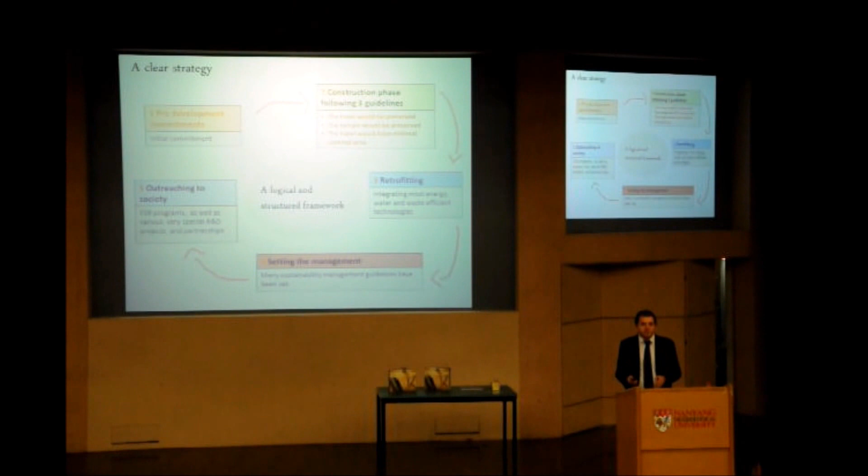The next phase was really about management and setting up a range of procedures, standard operating procedures, management practices, a lot of guidelines, setting up a management which will coincide with the vision of sustainable structures, not just from a structural point of view, but also from a soft approach with the management. And the latest phase of this sustainability strategy was really sharing what had been done with society, with a very broad range of stakeholders. And this resort has been quite successful at doing this. I can share some projects a bit later on.

So starting with the construction, what's very unique about the initial vision, there's been a lot of thoughts on how to build a resort on a forested terrain, and at the same time trying to preserve all the trees on site. So by trees I mean fully grown trees.

So if you come to the resort, you will very quickly notice that there are a lot of trees everywhere, and some of these trees are very well incorporated within the design. There are trees in very close proximity of structures. There are trees actually inside the buildings, inside some of the units where guests can actually stay and interact.

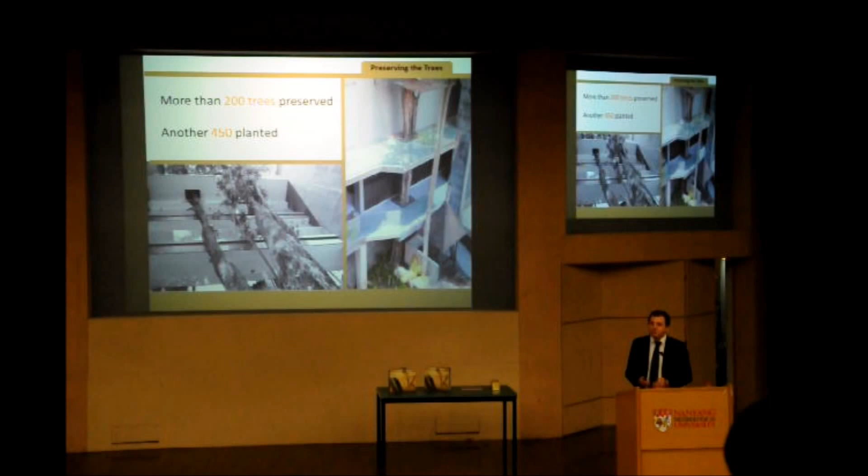It sounds easy actually to just say we're going to build a resort and preserve all the trees, but it was a very big commitment and a very big challenge in terms of construction practices, which are not very tree friendly, especially in Singapore.

So starting with the construction, most construction practices actually are very damaging to trees. If the trees don't die during the construction itself, they will most likely end up dying down the road a few months or perhaps years after the construction because of the damage caused, for instance, through vibrations generated underground through the different machines used.

So we actually apply a range of practices which really try very hard to minimize these impacts. Some very simple practices such as keeping certain distances between the main trees and the buildings in order not to affect the water cycle and the roots.

Another interesting practice was that before the resort was even built, the resort hired professional tree climbers that climbed all the trees and put lightning protections on all the big trees. This was both to protect the trees, but when you have so many trees on a site like this, you also want to make it safe for the people to be around.

So this resort actually has a landscaping team. The maintenance cost is actually quite high on a weekly or monthly basis.

Another important aspect was the use of machinery. Most machines in Singapore for construction, during the foundation works, use a lot of piling techniques which generate a lot of vibrations which can directly impact the tree roots and the trees.

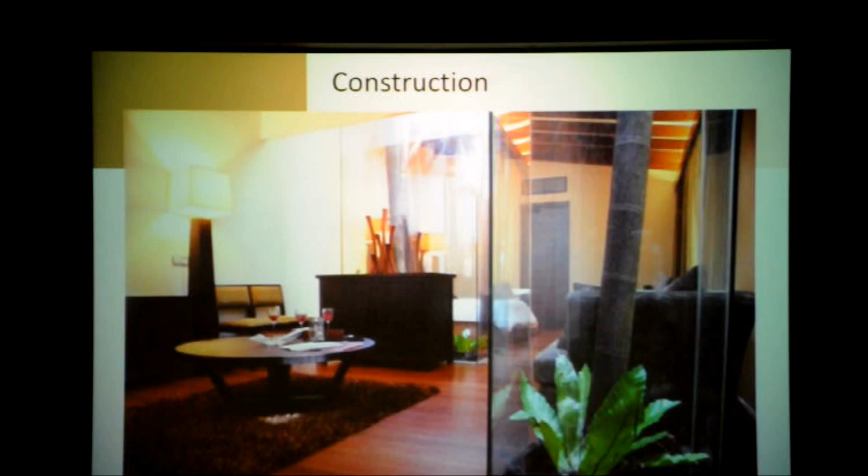As you can see, there are different types of rooms at this resort, and one of the special rooms are what we call the villa wing, which is located behind the resort. There are actually 12 villas, which are uniquely designed. They've all been very well incorporated as part of the design, custom-made to incorporate as much as possible the natural elements and to try to minimize these impacts.

As you can see, you have several trees. This is actually one of the smallest units. There are other units with many more trees and different types of construction techniques. But what's interesting is that different species of trees had to apply different techniques to preserve them.

So for this type of tree, for instance, we tend to categorize trees according to their rate of growth. So there are species which grow much faster than others. And for those which grow faster, we simply encase them in this kind of glass structure, so that they can have a lot of space to expand.

There's a few interesting points in terms of sustainable design with this concept. First, we can bring in a lot of natural light. Actually, the resort makes use of a lot of glass, and usually glass in construction is not so sustainable, it's not so energy efficient. But if you look closely, the glass is actually quite thick. It's a vacuum glass, and it's also a double glazed glass.

We have films on both sides which reflect certain radiation wavelengths to make it more efficient and keep the space cool. I will talk a bit later about the cooling systems that we have.

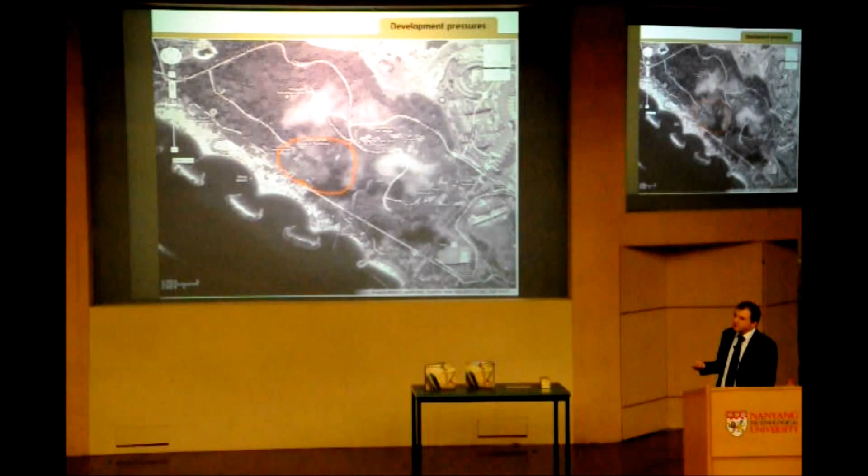Actually, the reason is that instead of applying conventional construction practices, which in this case would mostly involve doing a cross-section within the hill, cutting all the trees, flattening the land, and building from scratch from a flat surface which is stabilized, here we pretty much did the opposite, preserving the shape of the hills, preserving the trees, preserving everything which was there, and this played a big role in terms of preserving the ecosystem services on the site, which is especially apparent on this specific construction project, as I will talk about a bit later on.

There are quite developed water systems around the resort, making use of natural features, underground water systems. Preserving the landscape also helps to preserve the wildlife, the biodiversity, and a range of other benefits.

If we look at the satellite map of the island of Sentosa, we can see that there's really not that much greenery that remains. This is pretty much the secondary forest that remains on the island. If you look all around, you probably know there are all these big developments that have been going on, which have been quite heavy construction practices. So a lot of destruction of the forest and the land, a lot of reclamation work as well. The resort is pretty much within this boundary here.

So right in the middle of this patch of greenery, which also played an important role in the decision to develop this resort in a more sustainable way, to really try to preserve a bit of what was there.

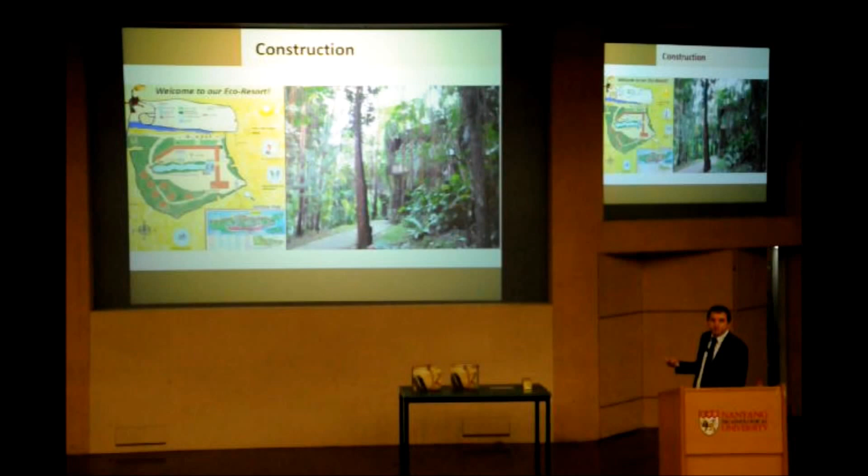Reused materials was another important aspect of the development. This resort makes use of a very high percentage of reused or recycled items within the core construction, such as cement, wires and metal structures, but also as part of so-called retrofits. Around the resort, some key examples would include this material, which we make use of quite extensively. This is actually one of the resort's own products.

This resort is a bit unique because there's the resort itself, but there's a range of other businesses which are closely linked, under the same management. So we can actually build things on other sites and bring them to the resort as a showcase and a test bed of various practices and technologies with a strong focus on sustainability. What's unique about this product? It's made 100% from recycled car tires. The manufacturing process itself is also considered quite sustainable.

There's less chemicals being used in the binding agents and other elements of the design, which makes it a sustainable product. Another good example is the extensive use of recycled wood around the resort. Actually, we collect a lot of wood from unwanted sites throughout Singapore, mostly demolition sites, which in Singapore would otherwise go to the incineration process.

As you know, in Singapore, because of the land constraint, most of the waste goes to a burning process in order to minimize the volume and then to send this to an offshore island for storage. But there's also a lot of issues associated with this in terms of the long-term sustainability.

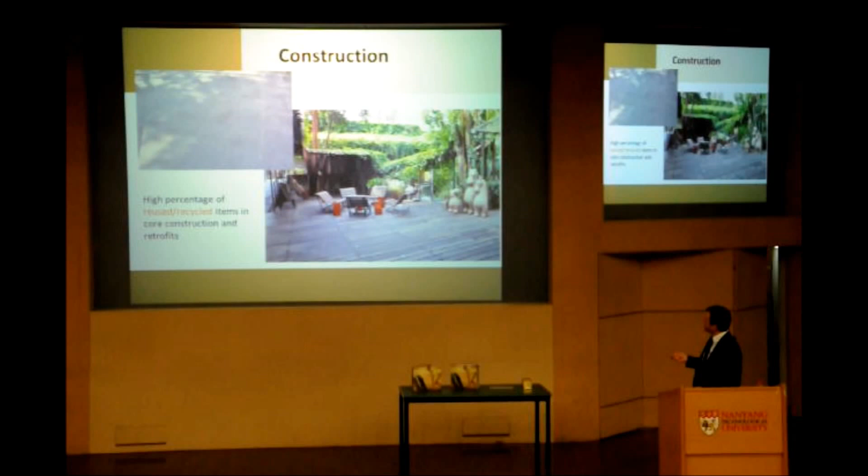In terms of design now, the overall resort was built on the concept of maximizing the use of natural light and natural ventilation. So pretty much all aspects of the designs are very open. There's a lot of elements which greatly maximize the usage of these two simple concepts. Some examples will include, this is part of the central court, and you'll see that it's very open.

We have an open corridor concept, for instance, which in many countries is taken for granted, but in Singapore, most buildings tend to close the corridors, which if you think about it, really doesn't make any sense from an energy point of view, even from a cost point of view, if you consider how much energy needs to be applied to cool down this space, which is most often aircon, to manage this type of buildings over time.

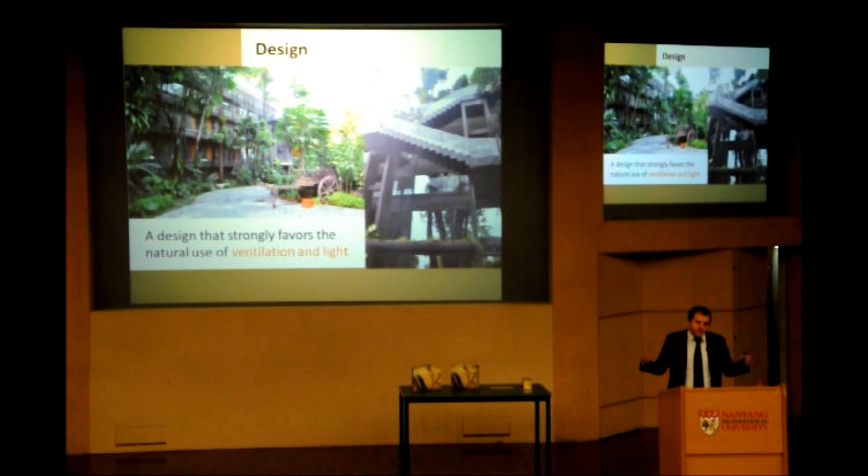Another important aspect of the feature is this central opening that we have in one of the main building blocks. This actually helps to capture a lot of the wind coming from the South China Sea. Because of the shape of the buildings, which is kind of a cone shape, it will actually speed up the wind and spread it within the central court, helping to naturally cool down the space.

In terms of water flow, there's been a lot of concepts as well as part of the design. A lot of the back-end systems have been customized to be more efficient. Some good examples will include the piping systems. Most construction projects in Singapore or elsewhere heavily use PVC pipes, which are these pipes here. Instead, we actually make extensive use of this type of piping, which is another type of plastic called PPR, which is more efficient especially in terms of heat transfer. There's less heat loss within the system by using this type of pipe.

We also make use of a multiple valve system. This is very important in terms of good water management. It's actually the best way to effectively manage water flow within a building. There are of course many initiatives where the government can give various kits to retrofit the sinks, the shower heads and so on, but this can only play a certain role.

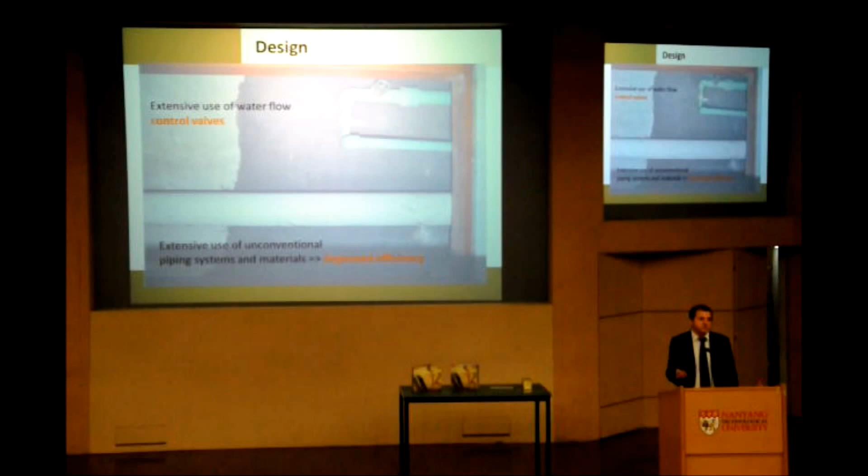By having a multiple valve system, we can adjust the water flow exactly to the level we want it to be, even at the unit level. So let's say within the villas, for instance, we can have different water flows for the sinks, for the flushing of the toilets, or for the showers, to try to find a flow which is comfortable without being excessive. And we've been quite successful at doing that.

Water treatment. This is the pool of the resort. This swimming pool is very unique from different perspectives. Yes, quite a unique concept. So the first unique aspect of this pool is its shape. Well, it's one of the longest pools in Singapore, about 90 meters long. But the shape is actually no accident.

The only man-made structure on the site before the construction began was actually a maintenance dirt road, which was utilized to maintain an old monorail system that used to run all around the island of Sentosa. It's no longer in operation, but there are still some trails that remain behind the resort. Anyway, the point is that the basic idea was to simply deposit the swimming pool on top of the road, and there are two main benefits of doing so.

First, they did not need to cut additional trees. They also did not need to compact the ground further, which would have damaged it and created more vibrations and so on. So just making use of natural features is actually a key concept of a sustainable design. Whatever can be used without modifying the initial shape of the terrain or the environment is the best approach.

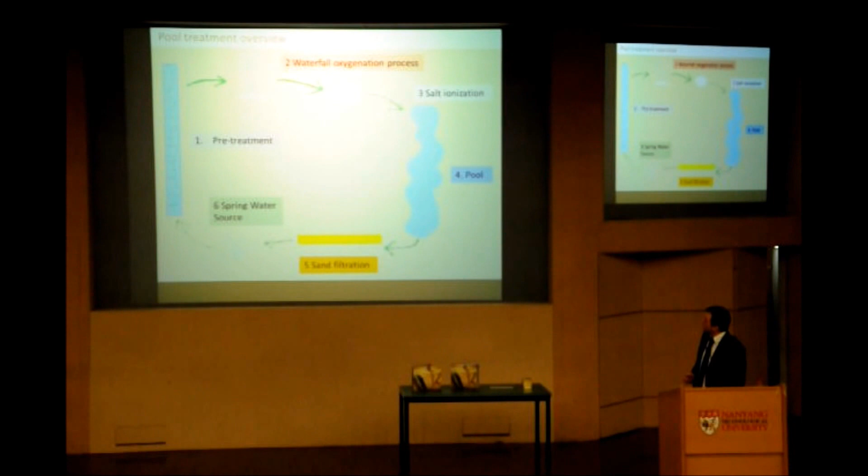What's also very unique about this pool is its treatment system, a very unique treatment system in this part of the world. First, people who go swimming in the pool will notice that there's no chlorine smell because we don't apply a conventional treatment using chlorine. Instead, we use a main treatment system referring to a concept called salt ionization, where we actually apply a lot of salt to the pool on a weekly basis.

The salty water will then be run through small electric currents which will interact with the salt crystals and generate some chemical reactions which will clean the water through this means. But more than this, the treatment process is more complex, and what's very innovative about this treatment is the holistic approach: we collect the water from the spring, which is collected down here.

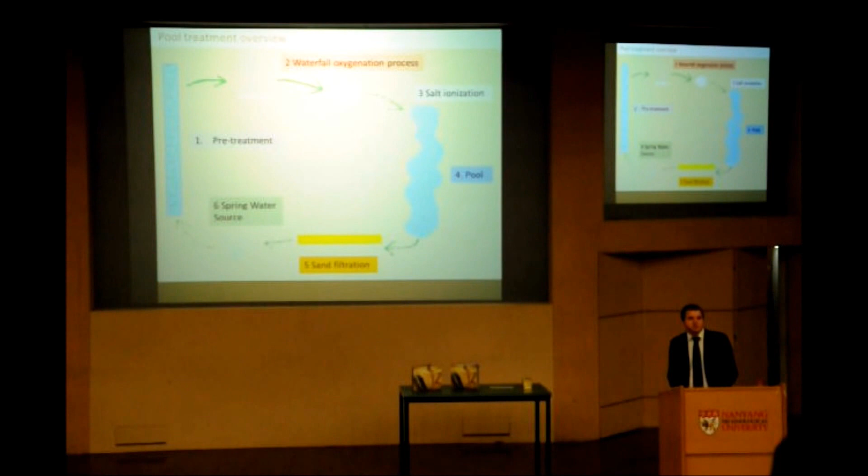Before the water goes to a more active treatment system making use of the salt ionizers and other processes using energy such as pressurized sand filtration, we actually apply a range of processes which are free of energy or apply very little energy. The first stage will involve underground storage in large tanks, and the reason for doing that is because it's spring water, the water is actually quite rich in minerals, especially iron oxides and other nutrients.

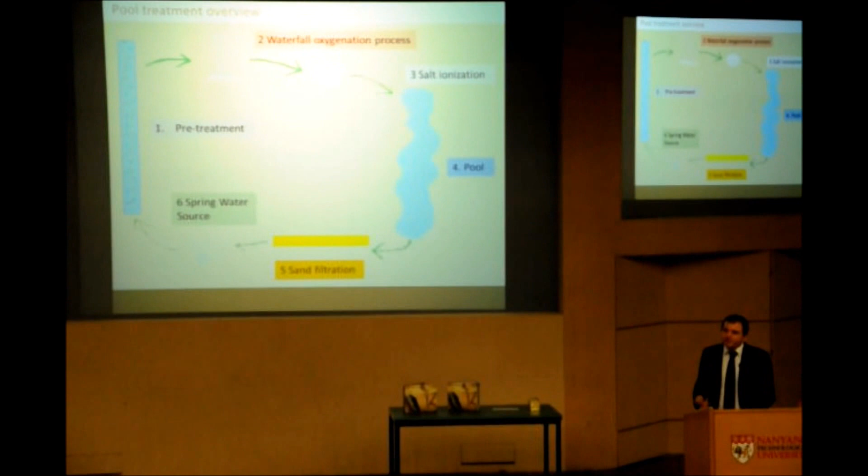It's a simple decantation process whereby the heaviest particles will simply settle down, and then the water is drawn out. It will then pass through a passive sand filtration. So we have a simple sand structure where the water will actually rise from below, go through the sand, through a simple process called capillarity, where the small pores in the sand will actually suck the water up, removing more particles.

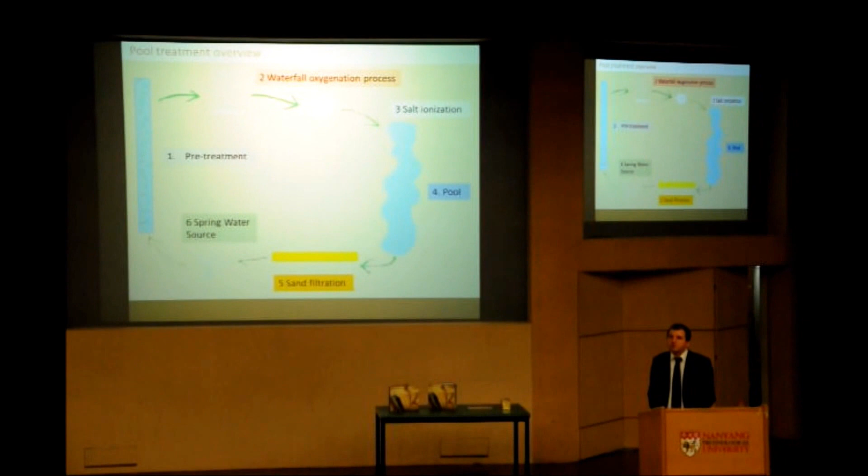Then we have these very long ponds which are on the second floor of the resort. And these ponds actually contain so-called biofilters. So we actually use the ecosystem as a cleaning mechanism. We identify various species of plants which can remove certain toxins, certain heavy metals, for instance, and some other plants will play more common roles such as surface filtration. We also have a lot of wildlife within these ponds.

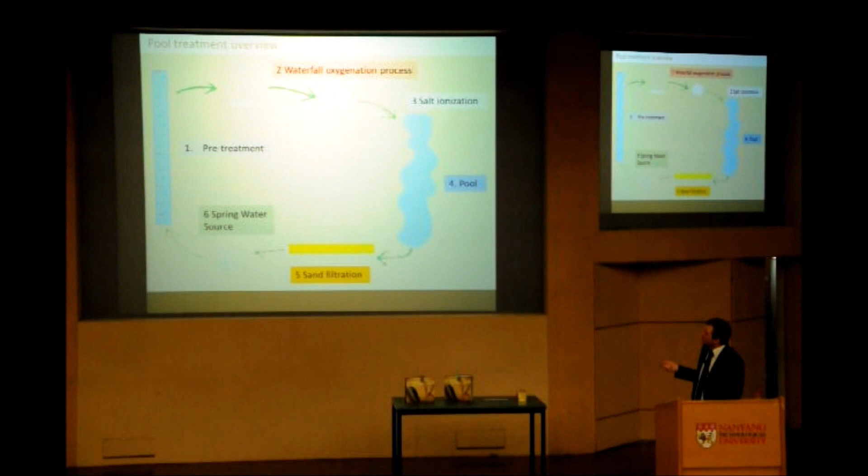Even though this is part of the treatment system of the pool, we have a lot of fish. We actually do aquaculture projects in these ponds as well. We grow different species of fish which we feed organically from waste from the kitchen. We also have an oxygenation process to keep the water body healthy, but also to generate some bacterial activity which plays an important role in the cleaning process.

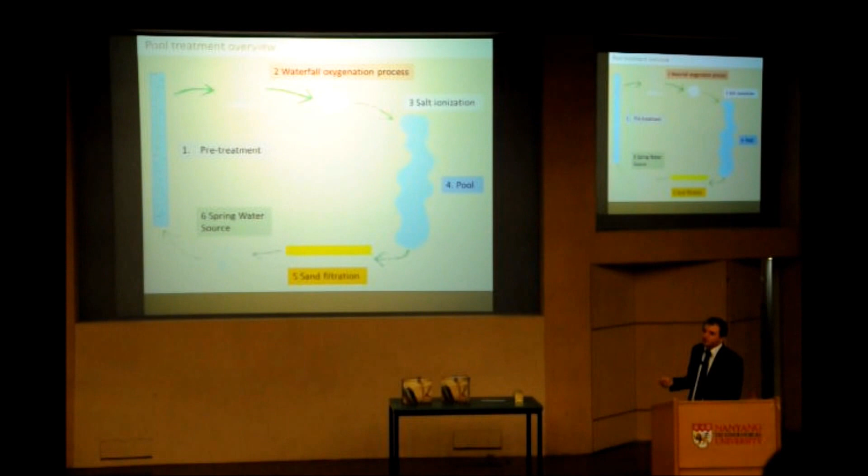And then the water will be pumped up and go to the active treatment system. We have a very high water flow in the resort, one of the highest in Singapore. What's interesting as well is that we can only apply this high water flow because there's no chlorine in the water. Otherwise, with a chlorinated pool, it would actually be toxic due to chlorine vapors generated at the merging of the water.

Energy solutions. There are many initiatives going on within the resort, but perhaps I will just select an interesting one, which actually makes use of the swimming pool as well. We decided to keep the resort air conditioned, and we thought many times about removing the air conditioning altogether and just applying a simple naturally ventilated resort or fans. But this is another important aspect of sustainability.

You also need to think from a business perspective and always weigh if it really makes business sense. The simple answer is that in Singapore, having a non-air conditioned resort doesn't make any business sense. We'd probably be out of business because of the requirements from the guests. So we decided to keep the resort air conditioned, but we have a very effective cooling system which is very energy efficient. The chiller system for the air conditioning unit will cool down water.

We do two things in one with one system. We cool down water for the air conditioning units, but in the process we also generate a lot of heat, which is always associated with a cooling process. Most businesses simply release the heat to the environment, which really doesn't make any sense. So here we capture this excess heat, store it, and then recirculate the heat throughout the entire resort. So when people take a hot shower within the resort, it's actually heat generated from the cooling system.

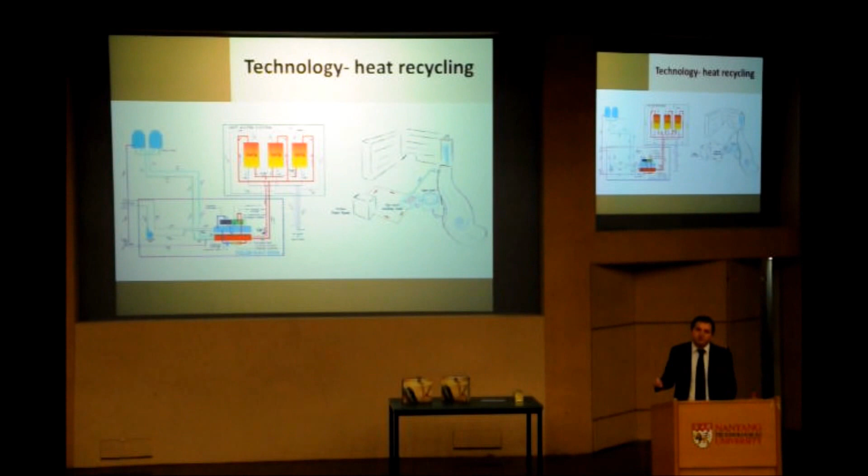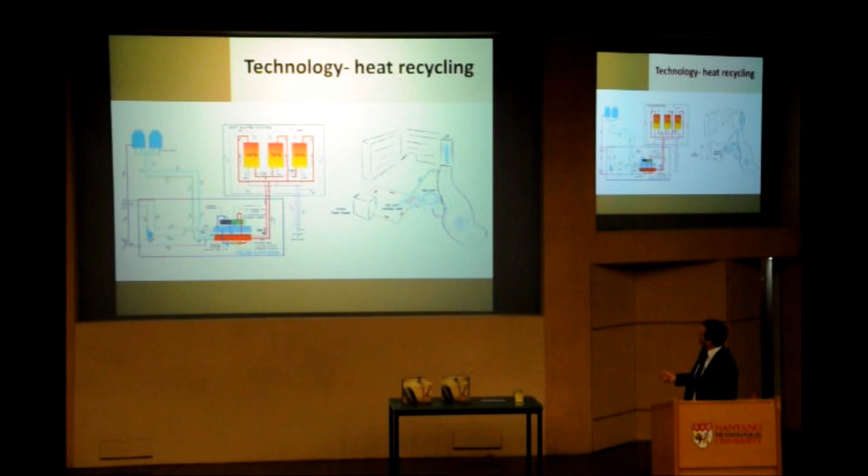We made quite a number of upgrades to the chiller unit, to the point that it became more and more efficient over time. Even after running the hot water through the entire resort, we were still left with quite a lot of excess heat. That's when we came up with this simple idea of building a hot spa. You can see it on this picture here. So that's the pool there.

Just on the side of the pool we have this small round one, which is heated water with a temperature of about 35 to even up to 39, 40 degrees on very hot days. One of the downsides of the system is that because it's linked to the cooling system, the hotter the day, the hotter the pool, which is not really intended, but that's the way it is.

This system is quite simple yet very innovative in this part of the world. It's one of the only systems of its kind in this part of the world, and I will explain why. First, we managed to have a hot spa which does not require any extra energy to be heated because it's just dissipating the heat generated from the cooling system. But because we actually run... okay, let me explain.

Below we have the spa here, then we have this pool bar there with a small solar system, which is different. The solar system is just educational, used for the lighting system and fans. I will explain a bit later on why we don't have extensive solar panels at the resort. Below this is actually a big tank, which is here. You can see an opening here.

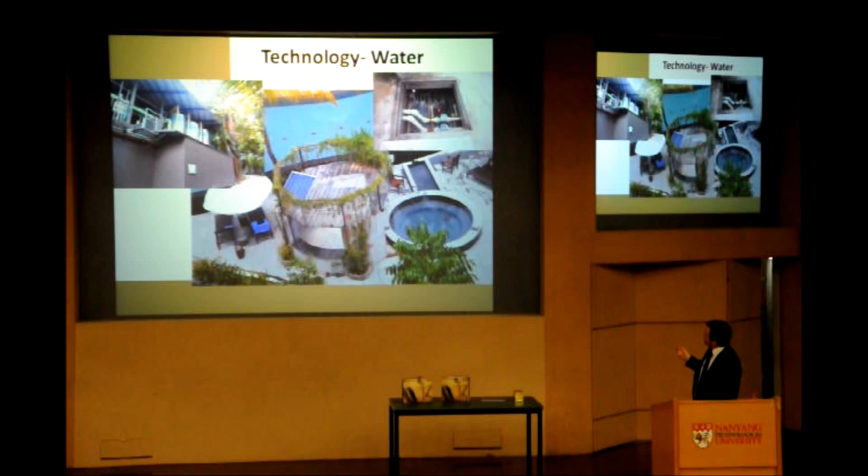So we have what we call a heat exchange system here, where we put the swimming pool water in contact with the heated pipes containing the hot water from the chiller system. The pool water put into contact will heat up and is then released to the spa here.

So first we managed to have a hot spa because of this exchange, but because we also put the hot water from the chiller system in contact with the swimming pool water, we also use the swimming pool as a cooling device for our chiller system. In other words, we use the swimming pool as a cooling tower. Since we've been doing this, we have completely switched off our main cooling towers within our chiller system, which really saves a lot of energy.

Rooftop system, we have probably still the longest rooftop garden in Singapore, which extends about 100 meters long. This is a very self-sustained rooftop system. It's very self-sustained because it does not require any maintenance, it just maintains itself through rain events.

A lot of people think of a rooftop system as very demanding, high maintenance, a lot of technology involved. Actually, this system is very robust, it's been there since the beginning, yet very effective, and we'll just explain the basics. Actually, you can imagine some kind of tank sitting on top of the building. And the only important aspect about considering a rooftop system such as this one is structural weight. So you cannot really put a rooftop like this on any building because it needs to be able to take

on the weight. Let's say if there's a plug in the system somewhere, water will start to accumulate, and that adds a lot of weight. So it really needs to be designed in terms of structural weight. And this building is designed to hold a swimming pool. So we have this tank sitting on top. At the base of the tank we have this kind of a small slope. The slope is very important because most of the water which falls through the rooftop will actually be flushed out of the system. And then on top of this we have this kind of eggshell structures.

By the way, the water which is collected coming out is very valuable because it's been filtered through the different layers that we have on top. So it's quite clean water already. Then on top we have some kind of eggshell structures which will accumulate just enough water to evaporate back to the system above, moisturizing the rooftop. And then on top we have different substrate, mostly sand actually.

Why sand? Because if we go back you can see we have small trees on top, and of course trees have root systems, and below this building is actually guest rooms. So the last thing that we wish for is the roots to cause structural damage or leakage or a range of problems. Sand is actually a very effective way to keep roots from going further down because most species, such as the ones that we have, really don't like sand at all. So when they reach the sand layer, they will simply spread and remain within the thin layer of soil that remains on top where the nutrients are contained. It's just enough to sustain the system.

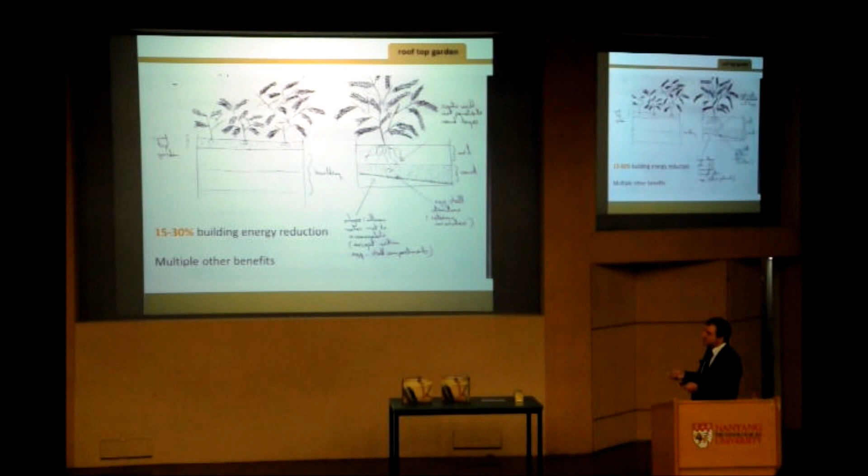There's really multiple benefits of having this type of rooftop garden. First, energy efficiency. This garden is actually very energy efficient. From the data that we've been collecting over time since the building has been there, we can clearly say that on average we can reduce the energy load of the building below, which is air conditioned, by about 15 to 30%, which is actually very high.

Going back to solar panels, we actually considered many times to cover the entire roof of the hotel, quite a large roof, with solar panels. Then we took a step back trying to understand if it really makes business sense or sustainable sense if you want. Actually, the simple fact is that in Singapore, solar energy is not that efficient. Why? Because of weather conditions first.

There's always a lot of water vapor in the air, a lot of clouds which will already cut a lot of the power. But there's also a lot of dust in the air from industrial activities and so on. So the panels, even though there's different practices to prevent them from getting too dusty very fast, will get quite dusty over time, too high maintenance as well. Especially where we are located. On the other side, actually, we can see a lot of big oil refineries and so on across the channel.

Energy efficiency is very important. And when we actually compare the average efficiency of solar panels in Singapore, which is about 10% converting factor depending on the condition, it's actually more efficient to have a rooftop, a passive rooftop like this.

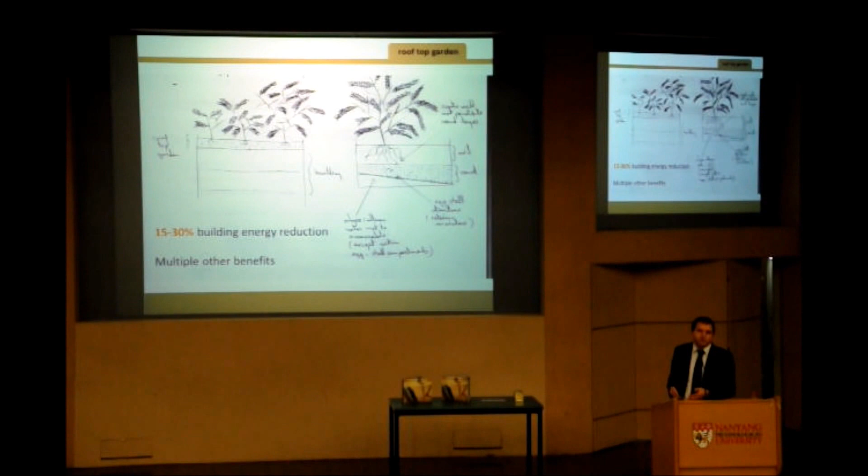There are also many other benefits from rooftops, such as flood control, which is very important in a city like Singapore, especially if we think of scaling up such a system at the city level. Other benefits include wildlife: planting a lot of flowers and trees can actually bring a lot of wildlife and maximize green coverage on top of structures.

Water, energy. Pest is another very important aspect of the management. Because of the overall concept of the resort, because we built the resort to preserve the land and all the trees, we actually have quite a rich biodiversity on site. So we try to preserve these species over time by looking at the different practices that we have. One of them is pest control, and when I say pest, it's mostly mosquito control really.

In Singapore, the conventional way of dealing with mosquitoes is conventional fogging, which is actually a petrochemical derivative, which can be effective at pushing away mosquitoes, but it's also quite harmful to other types of life forms. So we actually went away from this conventional way of dealing with mosquitoes to three other techniques which are more respectful of the wildlife.

The first technique that we use is actually another type of spray that we apply on a weekly basis, which is 100% organic. It's a process called BTI, which is also more targeted at the larval stage of the mosquito, so more targeted and less damage to other life forms.

The other practice that we use quite extensively is simply to utilize the ecosystem as a control mechanism. So we actually built a lot of natural water ponds around the resort, which contain a lot of life. There's fish inside them which will eat the larvae of the mosquitoes, but around the ponds they provide a lot of habitats to a lot of life forms which are considered natural predators of mosquitoes, such as frogs, dragonflies especially, small lizards and so on. Using the ecosystem to control mosquitoes can actually be very effective.